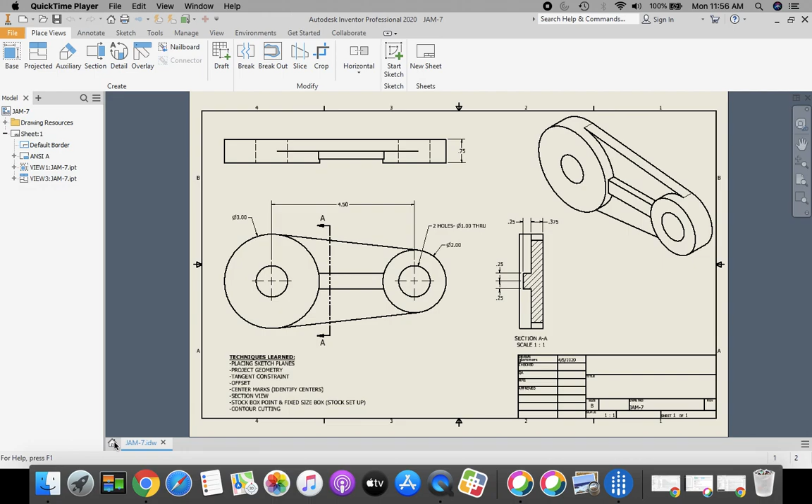To begin, from our home screen in Inventor, we're going to go to New in the ribbon bar, select Standard IDW, and click Create.

First off, we're going to change our sheet size. We're going to come over to our model browser on the left-hand side, right-click on Sheet 1, go down to Edit Sheet, and we're going to change this size from a D size sheet to a B size sheet.

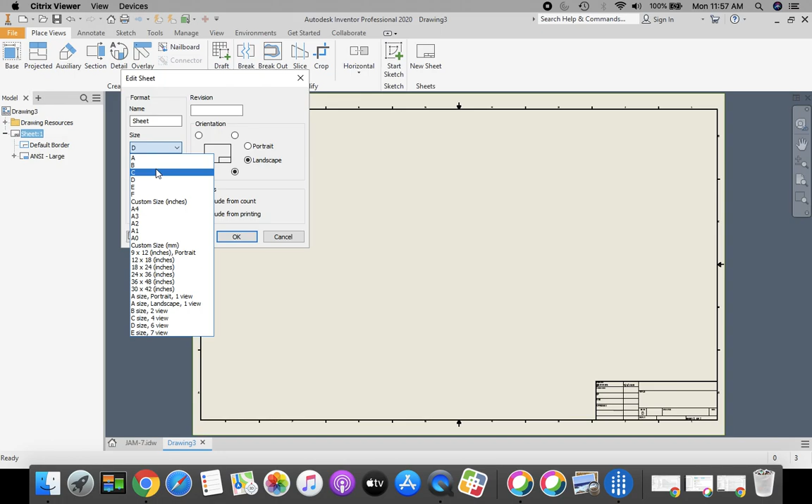Click OK. Next, let's come up to our ribbon bar at the top, select the base. We're going to go to our Browse folder with the magnifying glass, and in our H drive we're going to scroll down, find our 7 Jam part, and click Open.

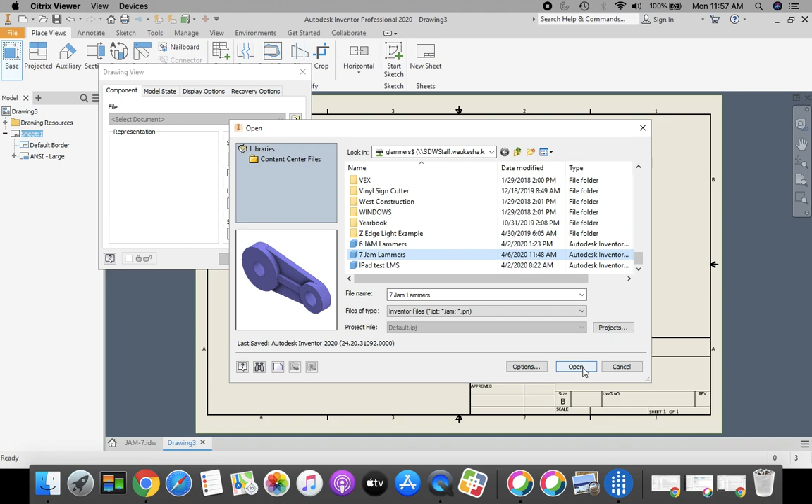Before we click OK, we're going to change the scale of this. It came up for me as half scale. We're going to change it to 3/4 scale. Once you've done that, select OK.

Bring your cursor over to your front view of your part until you get that red dotted line, and then we're going to push this over to the left-hand side. Make sure you're still staying above the title block here.

Next, let's go get that top view that's projected. So we're going to select my top view or project it. Now mine automatically locked on here with a graphic. If yours does not, click projected, come to your front view, click on your front view, and then it should project for you. So I want a front view, then I'm going to right click and create that top view.

Then I'm going to come over here for my section view. I'm going to come up here, section view is highlighted, and I'm going to click. I want to come right through the middle of this rib here without going through a circle. So I'm going to click and stretch a line down. That looks pretty good. Just make sure that's not coming through that circle. Then right click and continue.

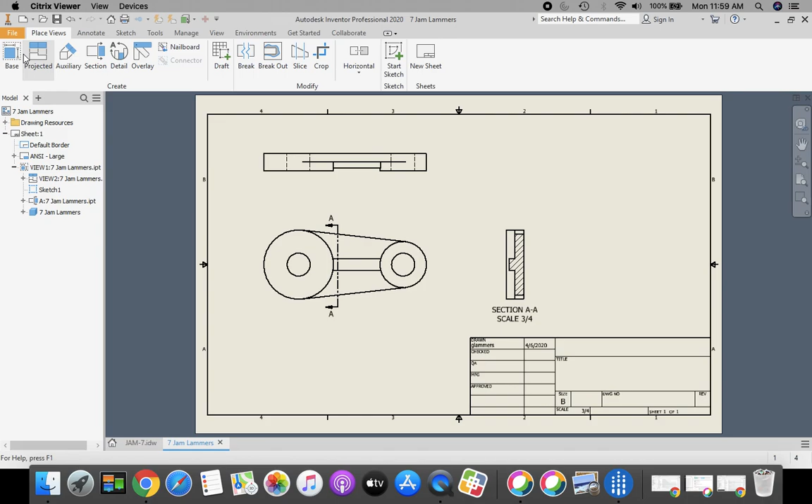And now there's my section view, I'm going to place on the right side. Now I'm going to go back, projected, select projected views, click your front view, and now I want that pictorial isometric over here in the side. Right click, create.

Okay, now let's take and place those dimensions on here. That's done through our Annotate tab at the top. Change from Place Views to Annotate.

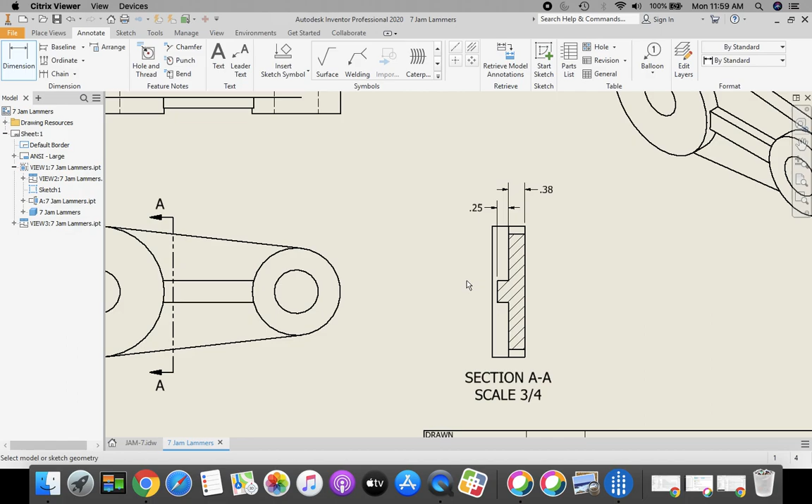I'm going to dimension, and I'm going to dimension my thickness, come in here on my side view. Thickness of that bottom. Thickness of that rib. We could also do the thickness of our overall part up here on our top view.

And now before we start dimensioning our front view, we're going to come up to the top and place center marks. Click center marks right here, click your 2 circles. Now we're going to place our dimensions from center to center. We're going to place our dimension on the side, place the diameter for the other one and our holes here.

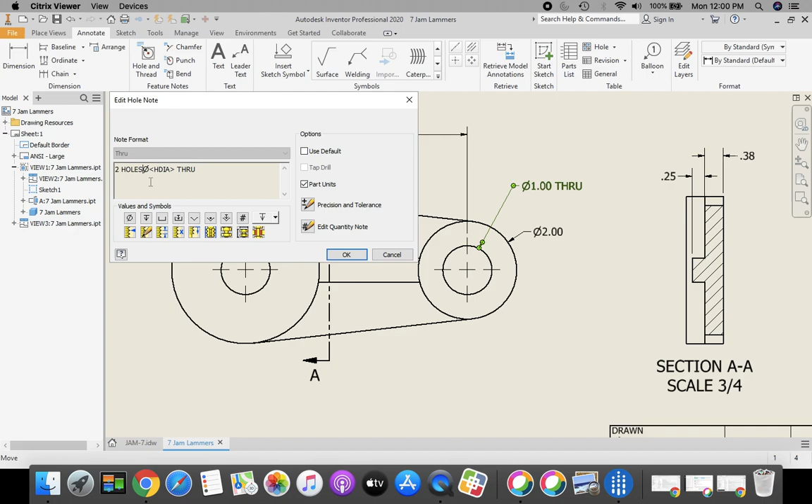Now if we just place a regular dimension, we only get to 1 inch. It doesn't give us the depth, so I'm going to press escape on that. We're going to use our hole and thread option for things that are holes. Go back, click on that, and now I get all the way through. Press escape. I can click on this dimension, put my cursor in the front, and I can add the note of 2 holes and click OK. See how that adds that dimension in there?

Wonderful. Alright, next we have our dimensions on here.

The next thing we're going to do is come up to the File in the top left hand corner, the orange file, and we're going to go down and save this part. So we're going to save as. Make sure this is going to your H drive. File name still the same.

Click Save. Now we have to prepare it as a PDF to turn into Google Classroom. So let's go to File, orange file in the top left hand corner. Go down to Export. We're going to export PDF.

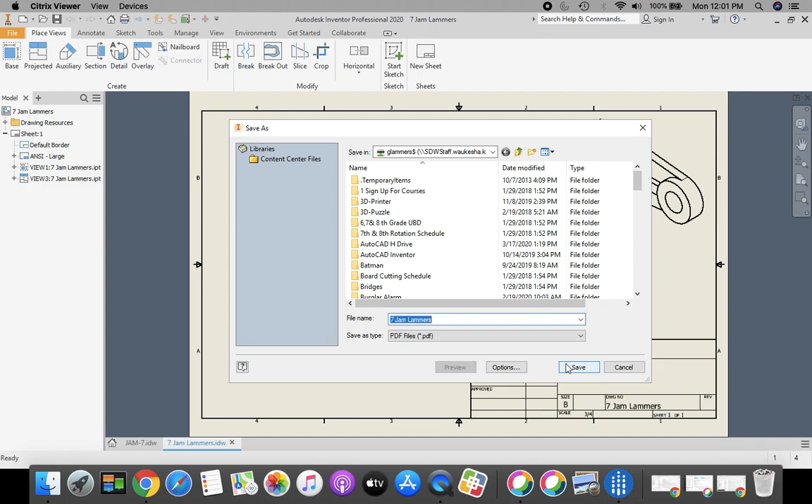Still going to my H drive. File name is still fine. Click Save. Now remember, we just got done doing all that.